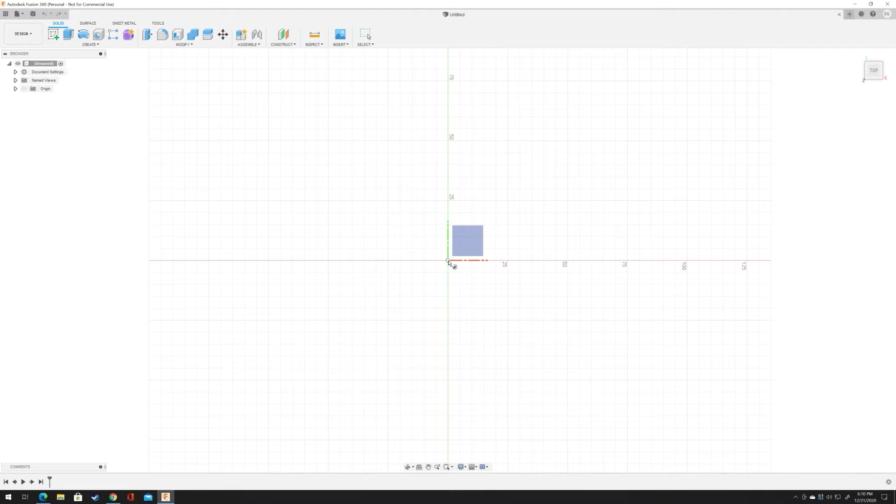So I'm going to begin with this one, which I'm drawing out right now. Here's our first circle, and I'm just going to bring it out a little bit. I'm going to go to the keyboard now and change the value you see in blue there, typing in the value I want. The value I want for this diameter is 25 millimeters. So I simply type 25 and hit enter. Now I have a 25 millimeter sketch of a circle that you can see here.

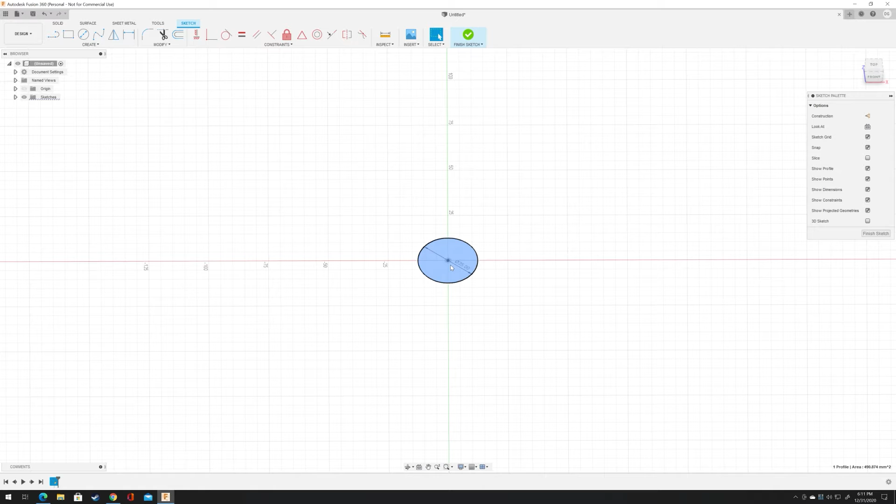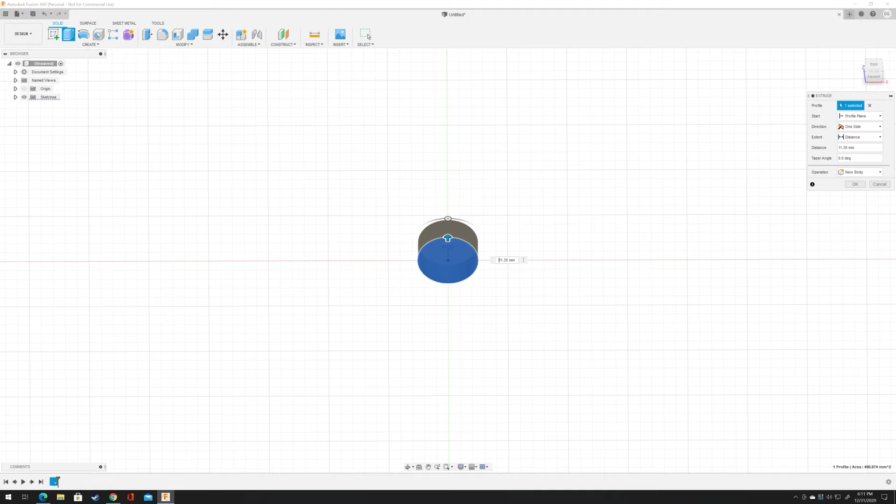From there, I'm going to select the circle and extrude a cylinder based on this circle. So I'll go into here and right click again, go down to extrude, hit the extrude item in the spider menu, and bring this up. For now, I'm going to make it 10 millimeters. And there you go. We got the base of our knob, our little hockey puck here, and it is 10 millimeters high with a diameter of 25 millimeters.

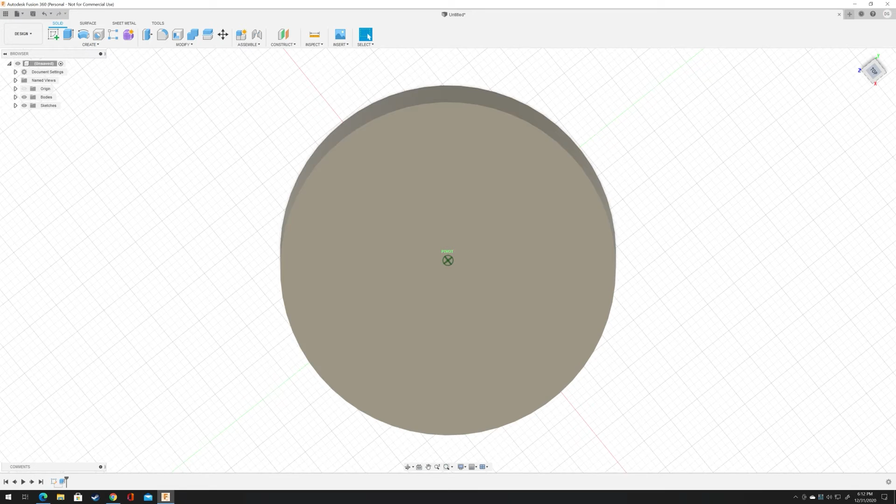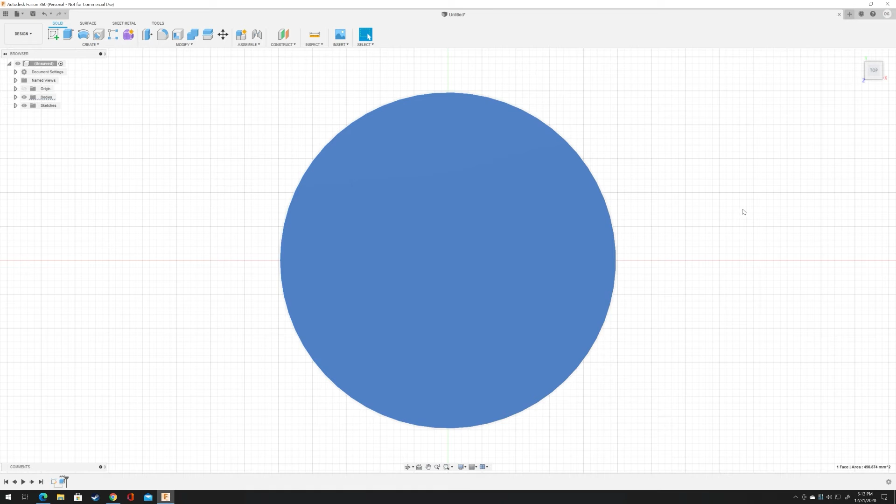What I'm going to do now is draw the bigger portion of the handle, which is going to be built on top of this surface right here. I'll go back, select it again since I lost it, hit the right button, go to sketch, go to center diameter circle, click on this, and this one is going to be much bigger. I'm going to make it 50 millimeters. Now, this is kind of large probably for a normal button, but for what we're doing here, I think this will do.

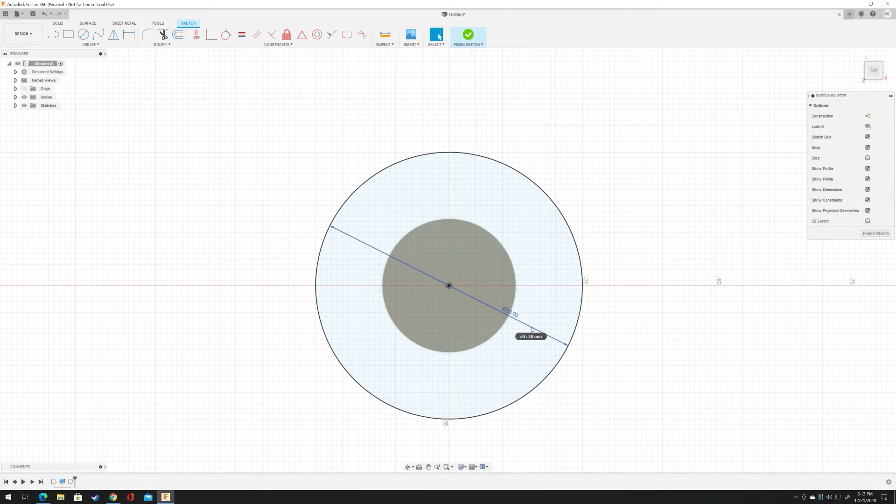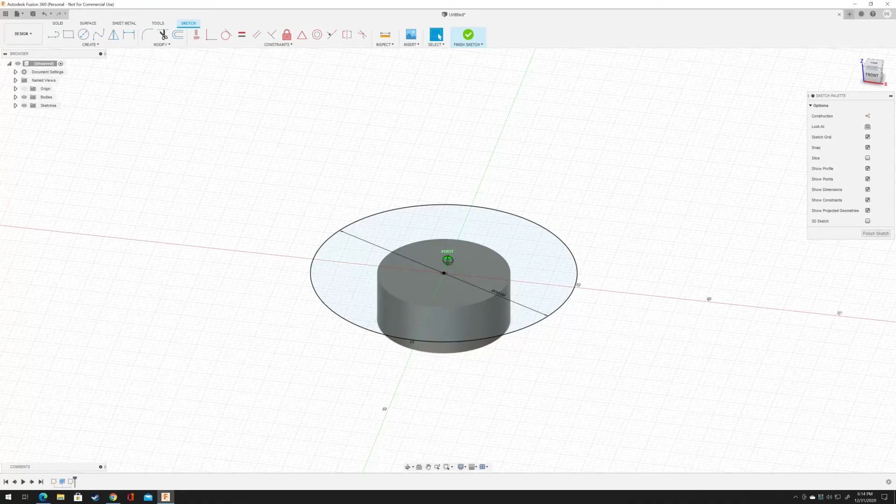So now we bring it up here. We can tell that we got a sketch riding off the top of our hockey puck, and this is going to be the handle hold portion of our knob. I'm going to go over and select this. Now, you notice when I select it that a ring appeared, and this circle is broken into two parts: you got the center, and then you got the ring. This is the consequence of drawing something on top of an object. You will have this. Now you can click them both, hold the shift key and click them both, and you have selected both of them. Or you could go over here and just select this, and you would have selected the top of the hockey puck again, or I should say the base.

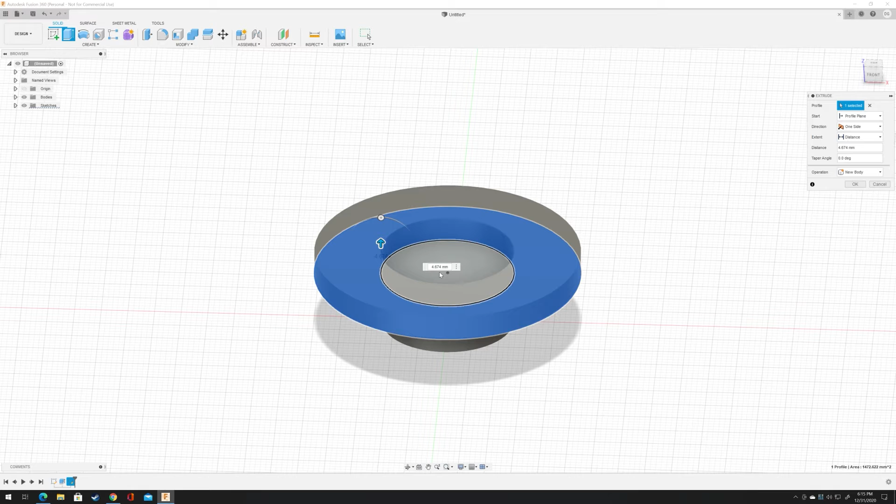I'm going to make a cavity which the bolt will hide into. To do that, I'll click on this ring, right click, go to extrude again for the body and the solid, and go up a little bit. I'm going to make this another 10 millimeters. Now, something to keep in mind here is that we're building a 3D structure.

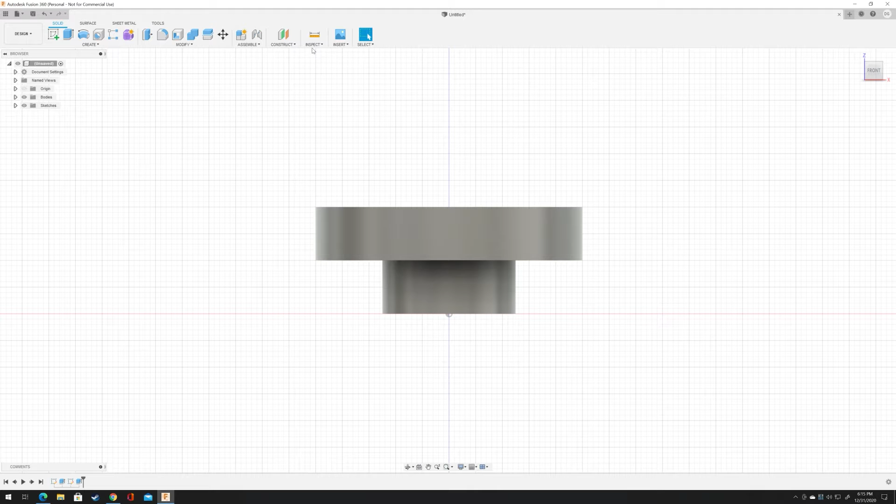As things stand right now, I'll go over here to inspect and cut this in half so we can analyze it from a cutaway view. You notice right away that if we went ahead and made a print, or generated this knob the way it stands, there would be an issue with the integrity of the object, and it would be very obvious looking at it right here.

Basically, the top handle would probably rip off from the base, and we don't want that. So I'm going to cancel this.

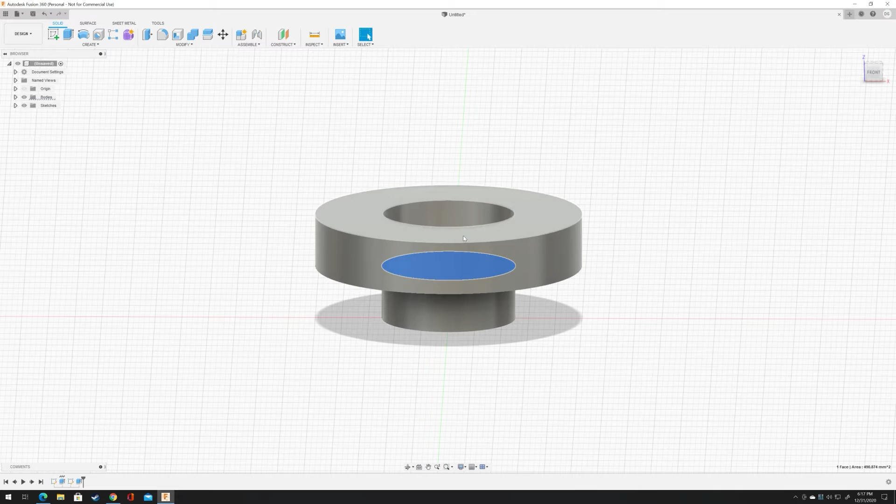I'm going to go back down here to the pivot again, and make sure I selected the top of the base of our knob, or the hockey puck if you want to call it, and go back up to here. I don't see it, it's not visible. Hang on a second. I'm going to select this... okay, it's here somewhere. It was here.

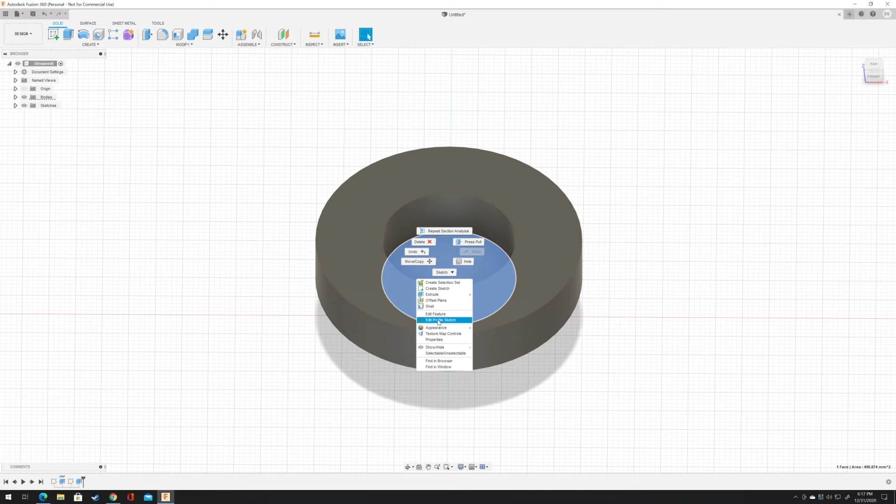Heck, I'm just going to use the E key. I'll press the E key, and that will force me into extrude mode again. In addition to the 10 millimeters, I'm going to bring this up another 5. And hit OK.

Now we'll go over here and look at this from the side view again. We'll do an inspect, a section analysis from this angle. And you can see now we have a lot more beef to the knob here.

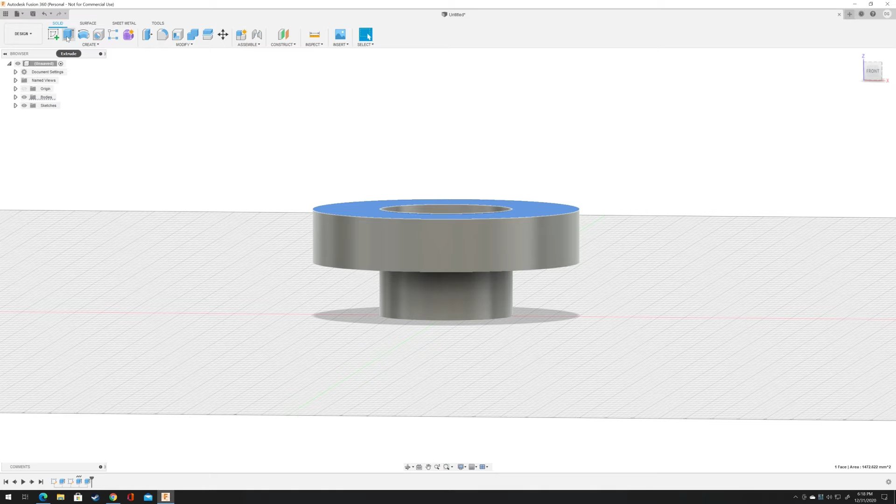About the only thing I probably want to do is raise this up just a little bit. So I'm going to go over here and hit this. This time I'm going to hit extrude from here, and raise this. It doesn't have to be much. Let's make it another 3 millimeters.

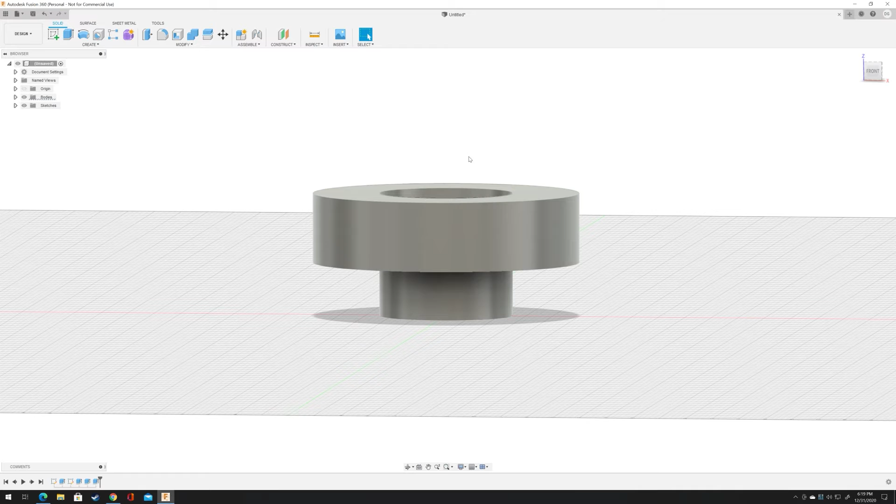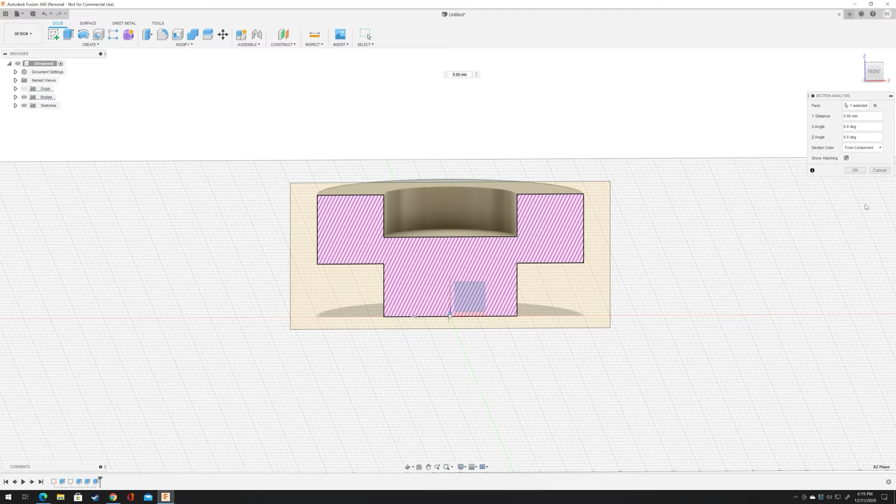It should be enough. So now we'll do an inspect, get things from a section cut in half, and now we have a little more space. We want to put a cap on this somewhere down the road, which I won't demonstrate in this video, but it's something I've done. We have enough cavity here that I can install a cap over this to hide the head of the bolt, which is going to be right here. So go and hit that, and there's our knob.

Well, right now we've got a pretty slippery knob, and I want to add some grooves to it to make it a little easier to turn with our fingers.

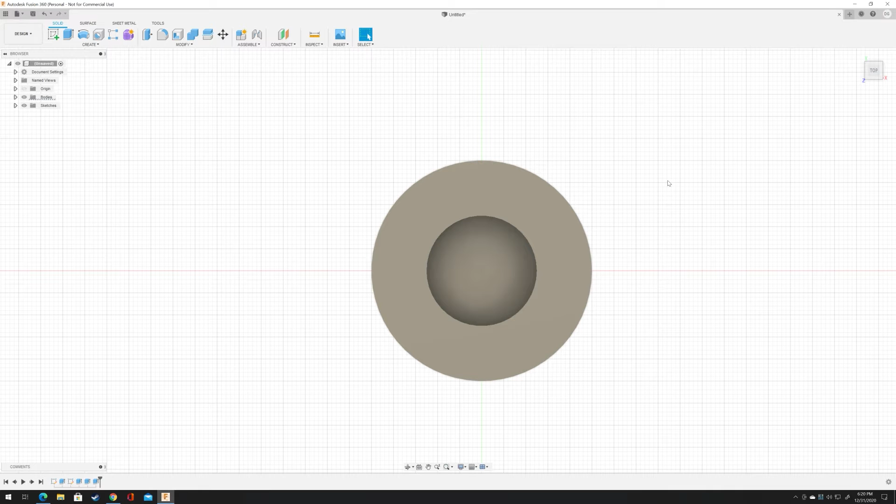So what I'll do is go back and generate some circles, and with those circles use some cylinders to actually cut notches. Now, it's a kind of strange concept to create an object to cut away an object, but that's generally how you shape things in Fusion 360, at least in the design mode. It's not that hard to do.

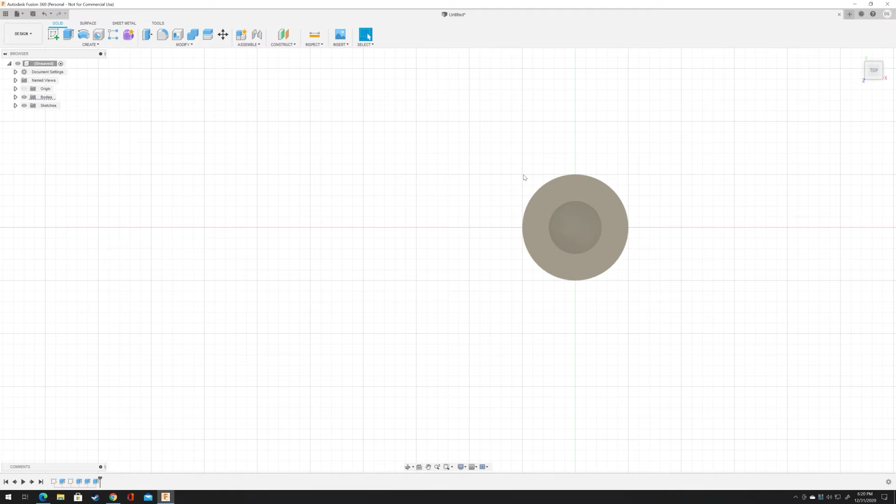Let's go over here. It's just like what we did when we made these two round objects here. We go over here, hit the right thing, go to sketch. Oops, right here goes sketch, create a circle. This time I'm going to go off the 25 millimeter mark here.

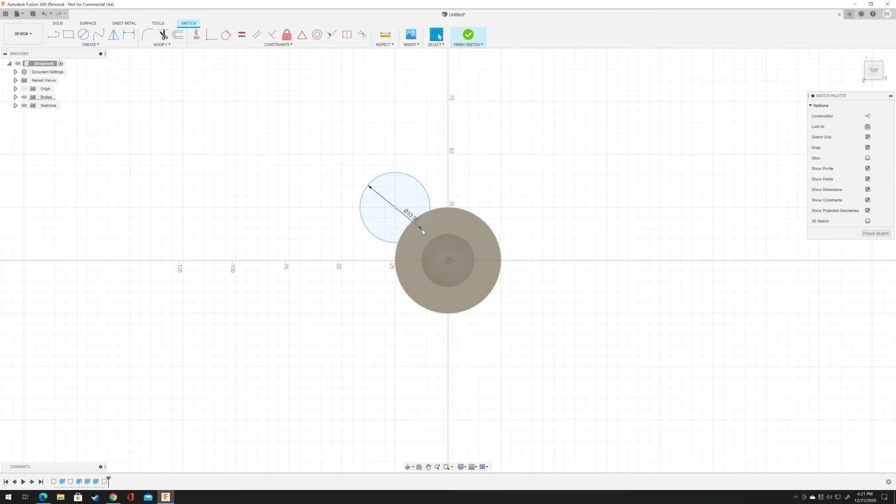I'm going to hit right there, bring it out, and make this 33 millimeters. And there we have the basis of our cylinder.

We can go over there and select it. I'm going to bring this over to the side here so you get a good view of what's going to happen here. We have our circle, and I'm going to go here and do an extrude.

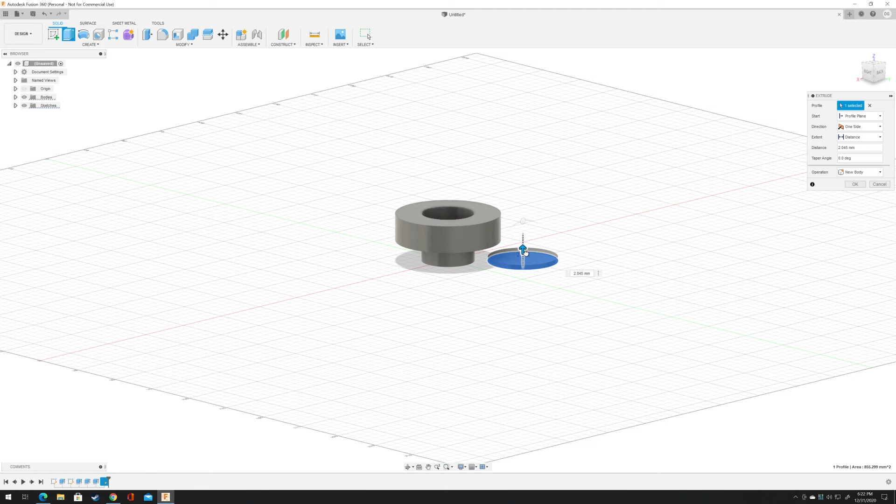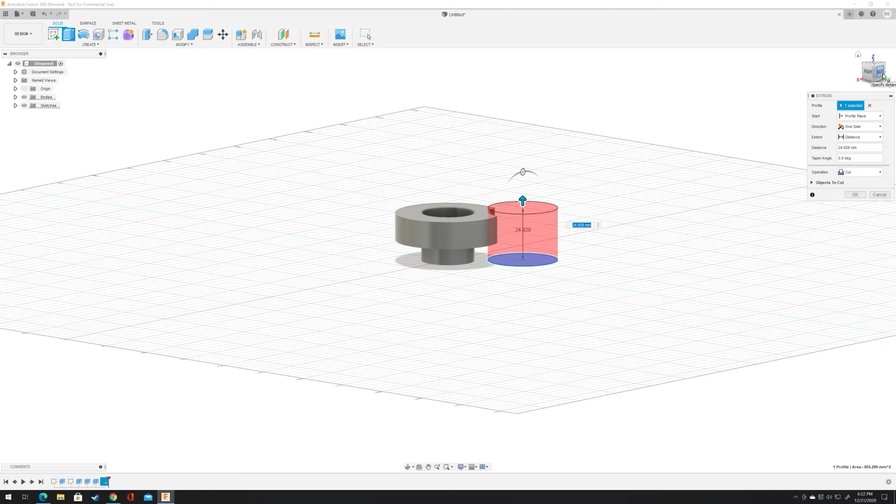Now, when I do the extrude at first, it's going to look like I'm creating a circle, doing a new body. This right here says new body over in the menu. So as I go up, I will intersect with this object here, with the handle, and you'll start to notice this thing is turning to cut. As I go around here, you can notice I'm milling away at the upper cylinder of the upper ring, and I'll continue to do so until I get up to here, and you can start noticing the cut right about here.

And this is the program assuming that you want to do a cut. This is what it does by default. Now you can actually go over here and you got different choices here. You got join, you got intersect, which is kind of useless, but it's there, as well as just do a new body, which is basically just generating a new body that's intersecting with another body.

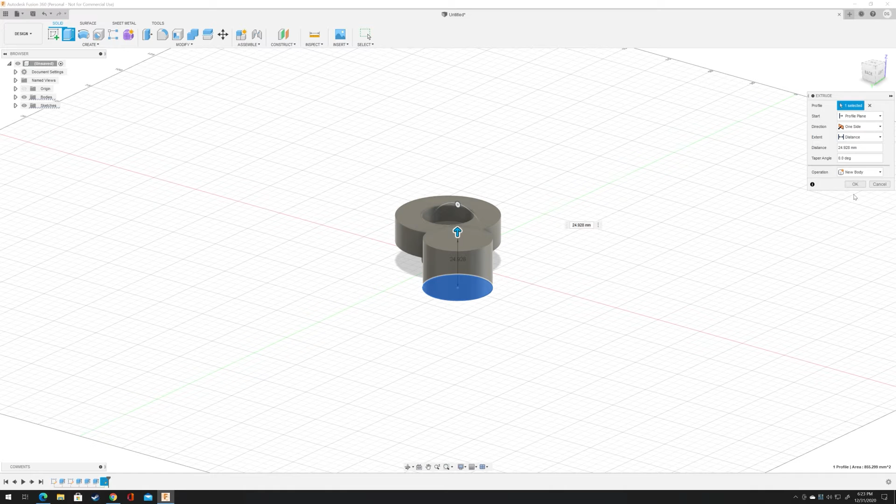What we wanted, of course, to do is cut, because we want to make the first notch of our finger notch for our knob. And so that's exactly what we're going to do. And how tall the cylinder could be, it really doesn't matter. It's just as long as you are cutting, going straight through the handle. That's all we're really concerned about at the moment.

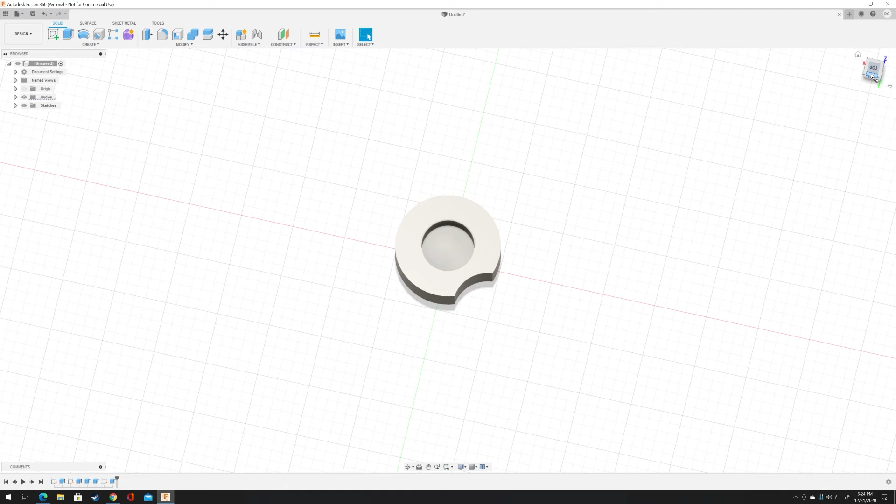And you can see the cut right there. So say, I like that. So I'm going to hit OK. And our cylinder will go away, and we're left with the absence of where it intersected, and we got ourselves our cut. So I'm going to go back here, and I'm going to do the same thing 4 times.

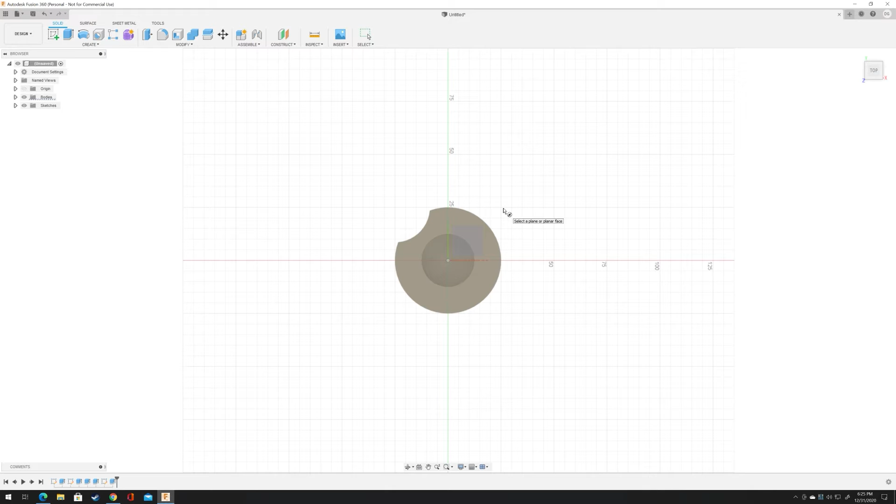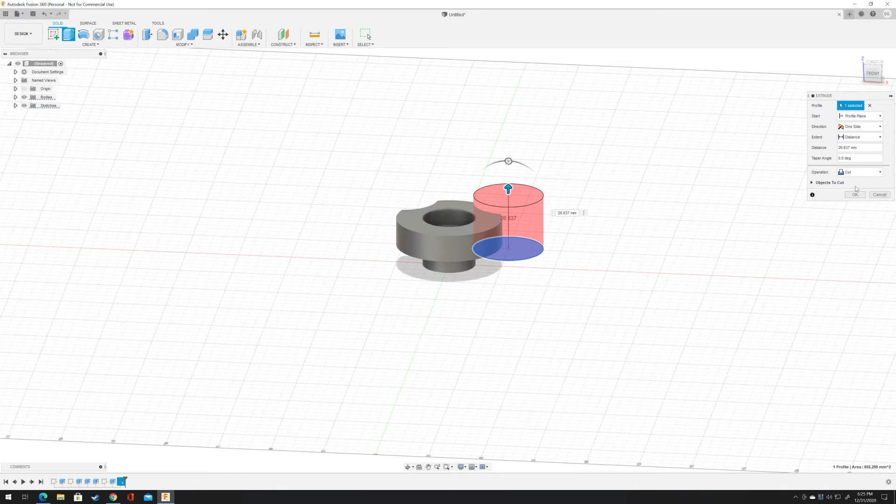And I'm going to start off here. Go sketch. Go center diameter circle. Go over and pick our surface right here. And go out. Type in 33. Go over, select this. And this time I'm just going to hit the E key, and I'll go to extrude, and then it will pop out, and eventually you'll see it cut through our handle hold here on our knob, and go plunk,

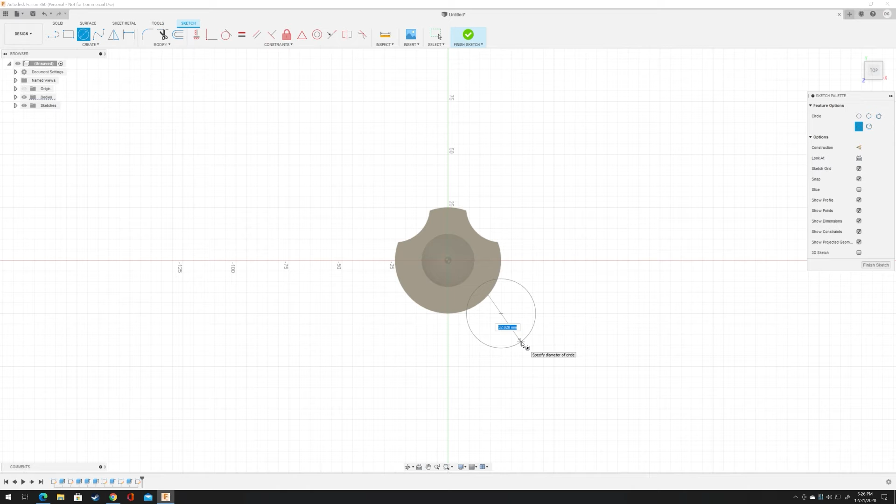and then go to the top, sketch, center diameter circle, plunk, plunk, and usually you've got to hit the thing twice where you want it in order to get it in the space that you want, because that's where the center is going to be. Well, you can tell in the corner here where the sketch palette is that you can choose between various different types of circles. But we're sticking to just a diameter generated circle for now.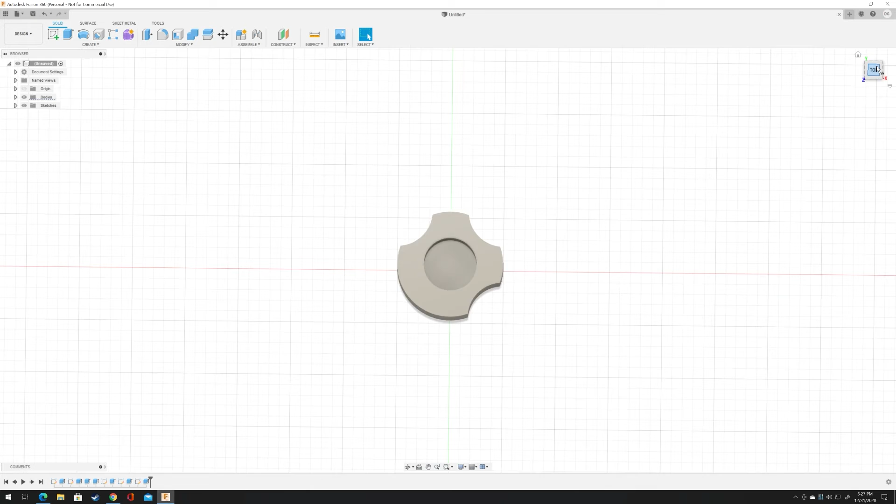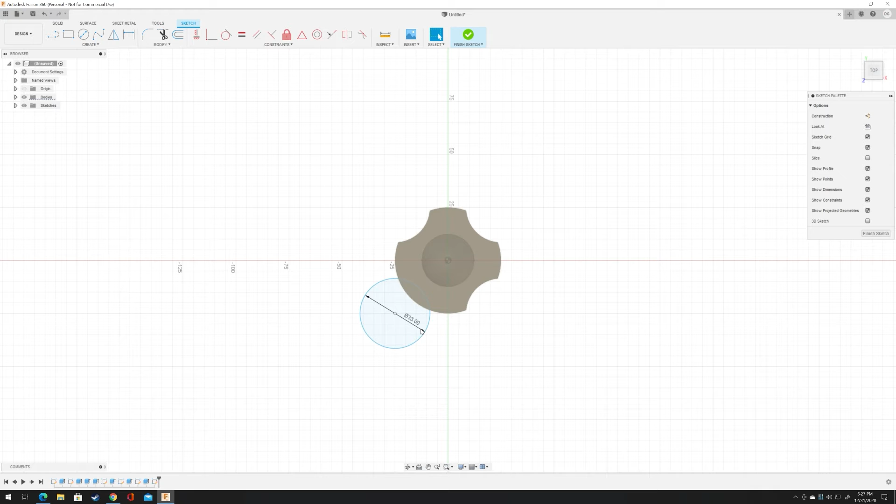I'll make it 33, enter, select, extrude, and I'm going to move it over on the side here so I can see the arrow. I can just pick up the arrow and just drag it through, hit OK. Do the same thing at the fourth quadrant. Pluck that. 33. Select. Hit the E key. Go through and cut our little thing. Extrude and cut.

And go over here and voila, you have the basis for your knob. There's your very simple little knob. Now the next part of our lesson here is, well, it'd be okay to put a hole in this thing. That would be one thing we could do. But it would even be better if we can recess a bolt, a cavity that would precisely fit a bolt. And this is one of the times where Fusion 360 really shines. And I'm going to show you why.

I'm going to go over and go into the Insert menu here. You could insert various other objects into this drawing to add whatever detail you want. But the one I'm interested in is insert McMaster-Carr component. McMaster-Carr is a company that generates everything from bolts to, you know, they have welders, they have everything. They're a little bit of everything. They're like the ultimate hardware store.

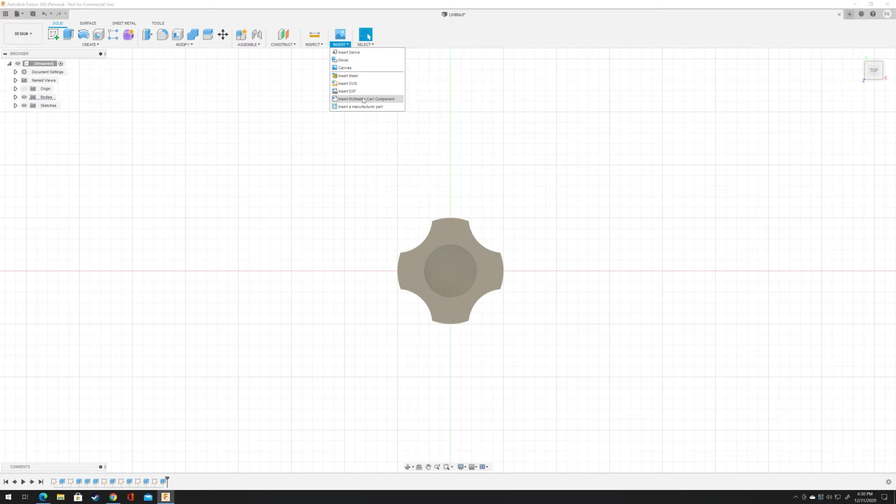And one of the nice things about McMaster-Carr is with their components, particularly their bolts, their nuts, their hooks, it also comes with a CAD drawing that you can incorporate into your drawings. And that's what we're basically going to end up doing, we're going to end up borrowing one of these CAD drawings from this catalog that they have. I'll click on it and you will see the catalog right here. I'll try to make it a little bigger.

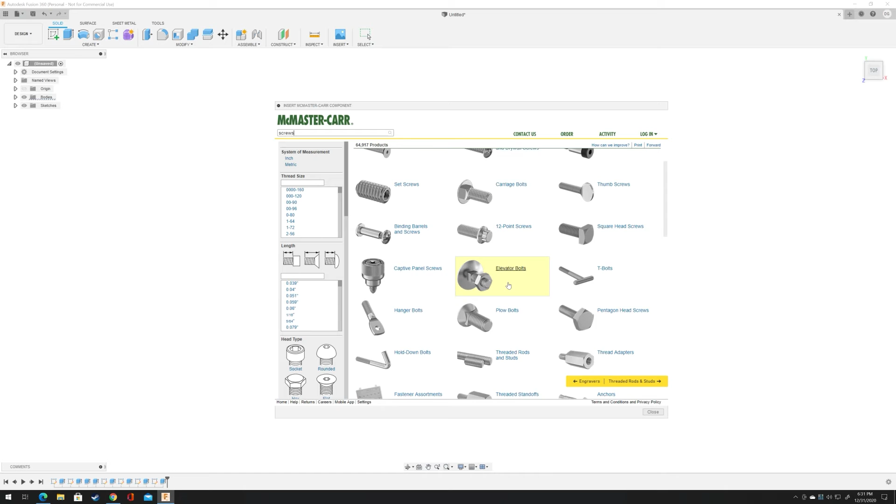And we got here the website of McMaster-Carr, and we can select various objects here that more likely than not have some form of drawing. At least most of the items they have drawings that you can use in CAD design. In our case, what we're concerned about is the bolts. And here's a whole list of their bolts. They got just about every type of bolt that you could ever want.

I'm interested in hex head screws, so I'm going to click on that. And I'm not too fussy, you know. I'm going to go pick a grade 8 steel hex head screw, which is more powerful than I need, but will do the job that we want to do at this time. And I'll click on that, and then we get a whole list of their partly and fully threaded bolts. And it's at this point that I can go over here to the little side menu and define exactly what I want.

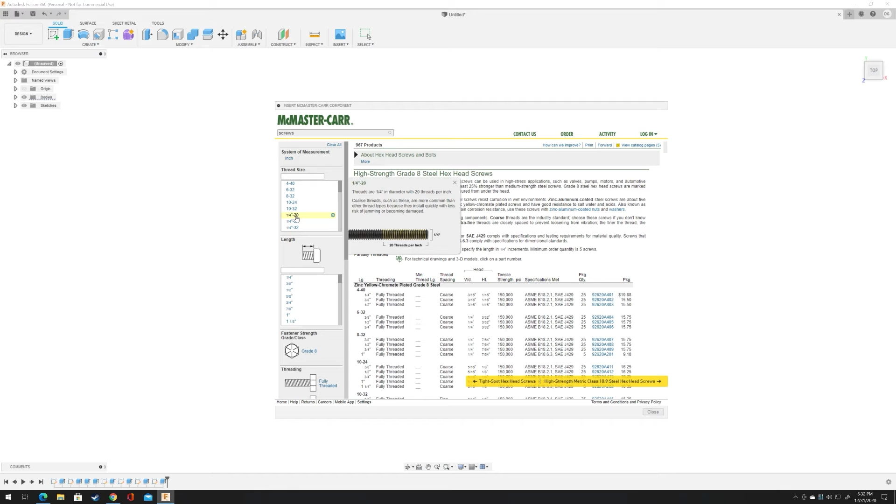And in this case, I want a 1/4 inch 20 thread per inch bolt. I want it to be 2 inches long. I want it to be partly threaded. You'll see why later on. It'll of course be grade 8. It will be steel.

And the head width will be 7/16. The head height will be, oh, we get a choice. Well, let's pick the slightly larger. And there, we're down to one selection over here.

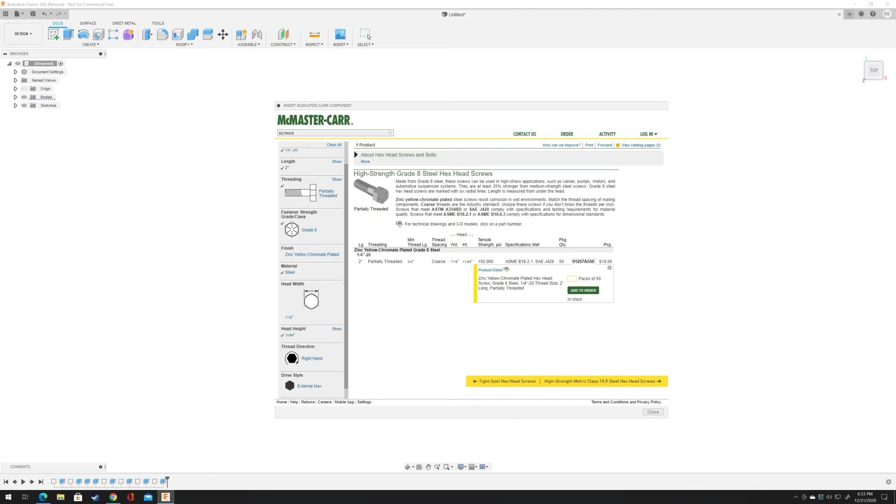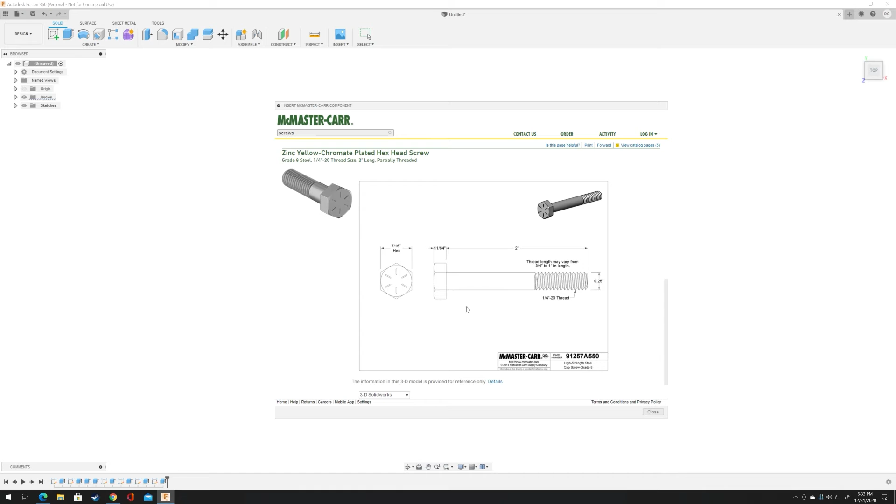And then we're going to go over here. We're not actually ordering anything right now, but we do want to see the product detail. We can click that right here. And we get a very deep detail, including a nice little draft drawing of our bolt.

But we also get a downloadable 3D drawing or 3D model of our bolt that we selected. And for the sake of Fusion 360, I'm going to pick a 3D STEP bolt drawing. And I'm going to hit save.

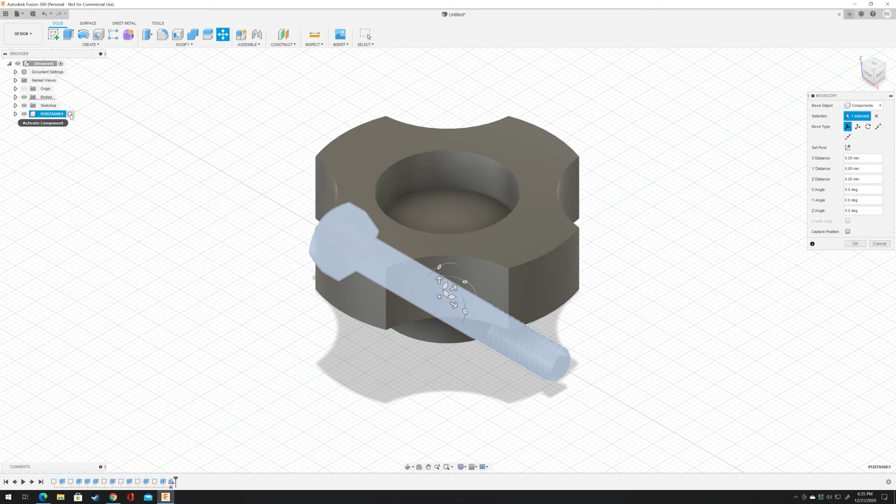And the thing disappears. And our bolt, first of all, appears down here within the base of the drawing. It is rotated. We're going to fix that. It's in its own little separate class right now. We're going to have to go in here and turn it on. And I'm going to click on this. Oops. At least I'm going to try to click on this.

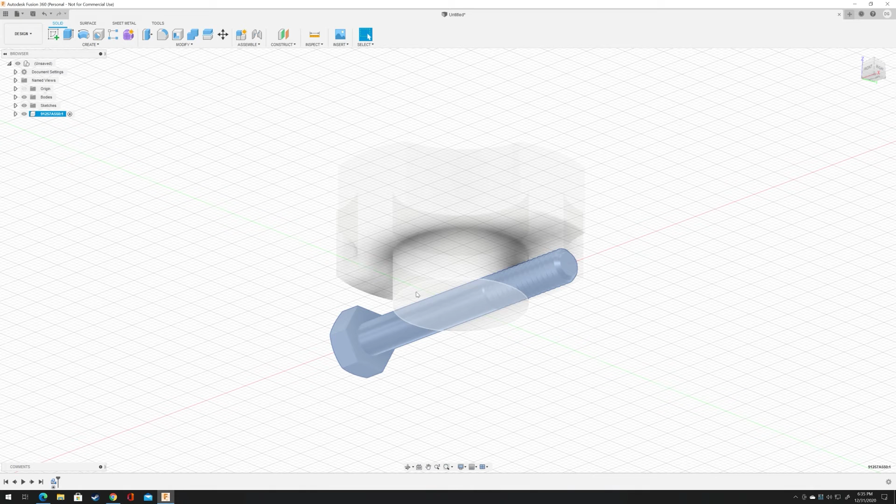I'm going to click on this, and I'm going to go in and move the bolt and rotate it. I got these little things over here that I can use to rotate the bolt any way I want. But I'm going to go here to the front. And for right now, I'm interested in just this right here and just rotating the bolt so it's straight up and down at a 90-degree angle.

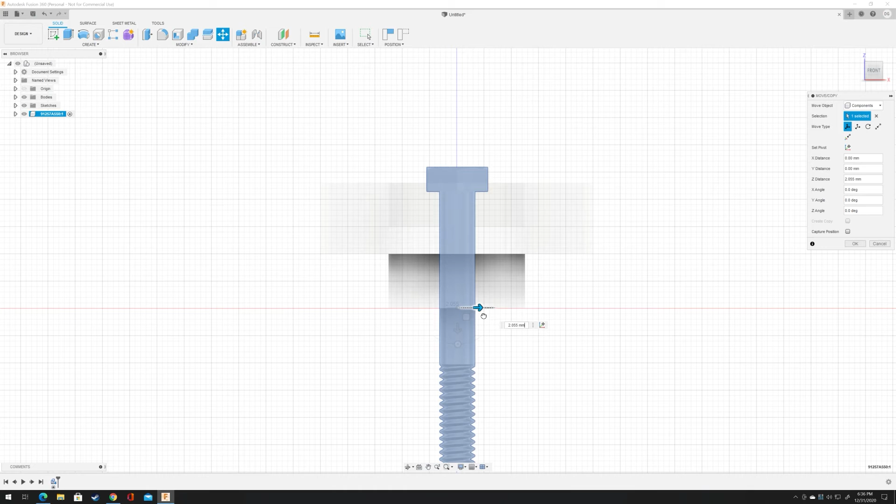And then I'm going to move this thing so it's kind of dead center. I'm going to use the guides to kind of eyeball this thing in here. And then I'm going to go over to the top, and make sure that this thing is center to the top here. I think this is about as center as I'm going to get it. It's at 0, 0. And Z is 0.54 millimeters.

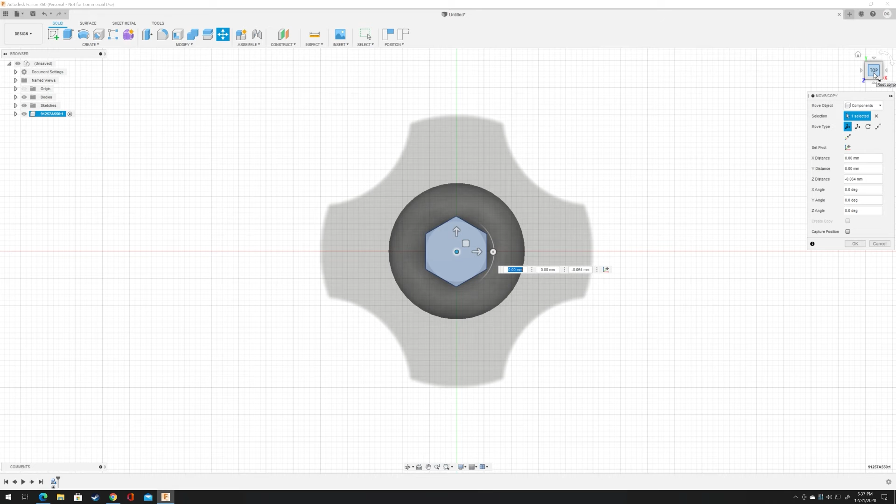I'm going to bring it down here again. I notice it's a little north of where I want it to be. So I'm going to bring it down to roughly here. And I'm going to turn it around and say to myself, well, I could go a little further south. What I'm shooting for is to make sure that this stays above this surface that you just barely see here.

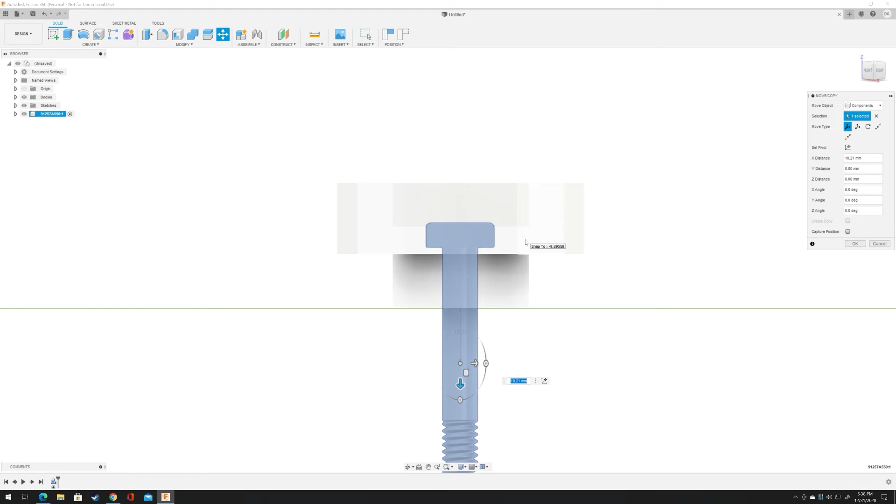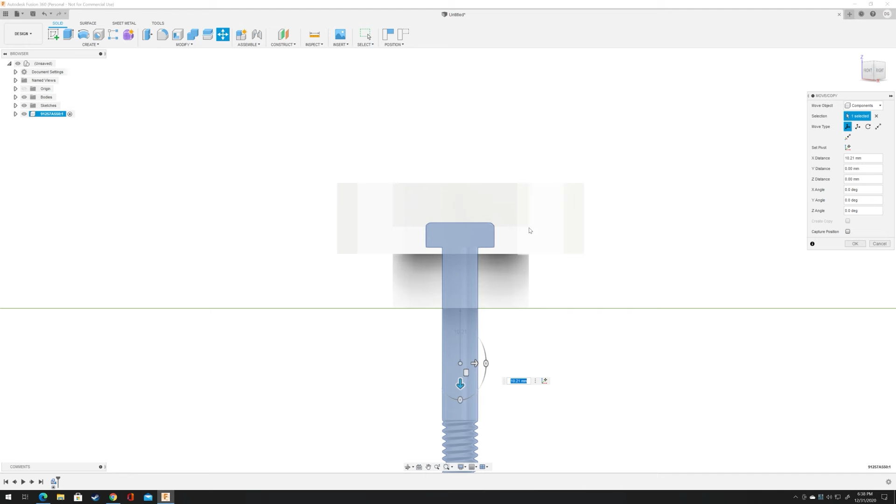So what I'm going to end up doing is selecting the object as the subject of what I want to cut and using the bolt as the cutting tool. And I want to make sure that this ridge up here is above the surface line, which is right here, which is part of this right here. And as far as I know, everything looks cool. I'm going to click OK.

So we have our bolt placed in our knob. You can see that we are ready to cut our hole. The nice thing about using these particular bolts is the bolt is pretty standard. So we could use the bolt that we got from the catalog. And in fact, the catalog number is right here if we need it.

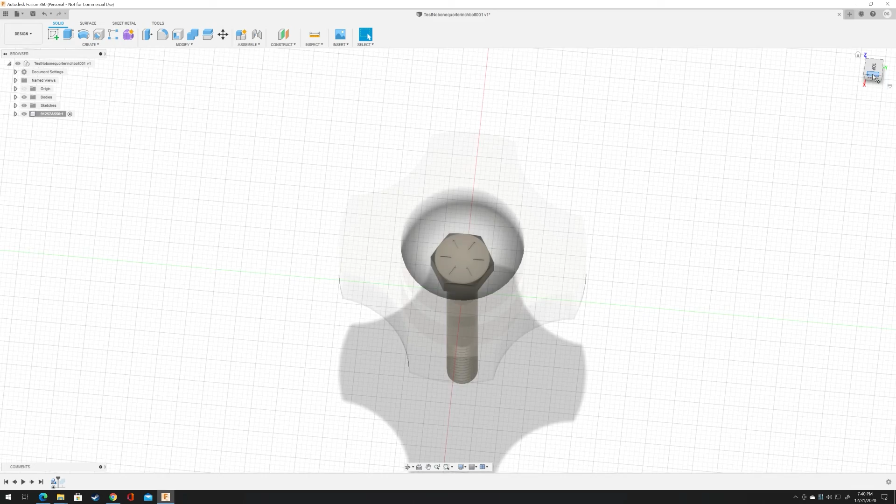Or we can use anything we can get from any other source like Home Depot or your local Ace Hardware, and use that bolt, but it should work for this knob no matter what. But first, of course, we have to cut it. So that's going to be our next step, to go back into our knob here, because this is set up as its own body, which is great because that's what we need. Go ahead and go to the top.

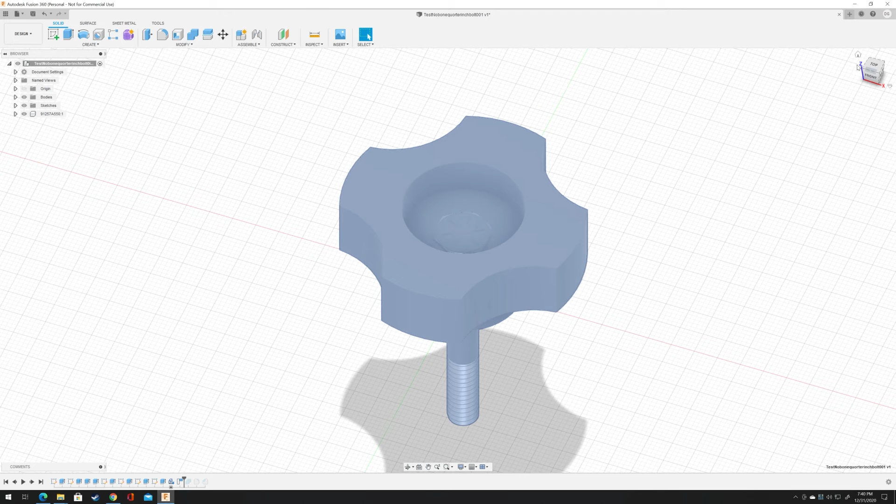Now I'm going to use the combine tool. It's kind of strange to think about using combine to cut, but that's generally the nature with Fusion 360. You often use an object to either add or to remove. In our case, we're trying to create a hole using this bolt, and we're going to do that using the combine tool.

Now under combine we can either join, we can cut, or we can intersect, just like I showed you earlier on. With a combine, you have a target object and you have a tool body. In this case, our target body is our knob, and our bolt is going to be the tool body, the item that we're going to use to cut the hole with. So we'll start off by clicking on this.

And sometimes when you click on this, you'll get a message that says the position has changed. But you want to use whatever is there at the time. If you don't want to change the position back to the original position, just say continue, or calculate using the existing condition. In this case it didn't come up, so I'm not terribly worried.

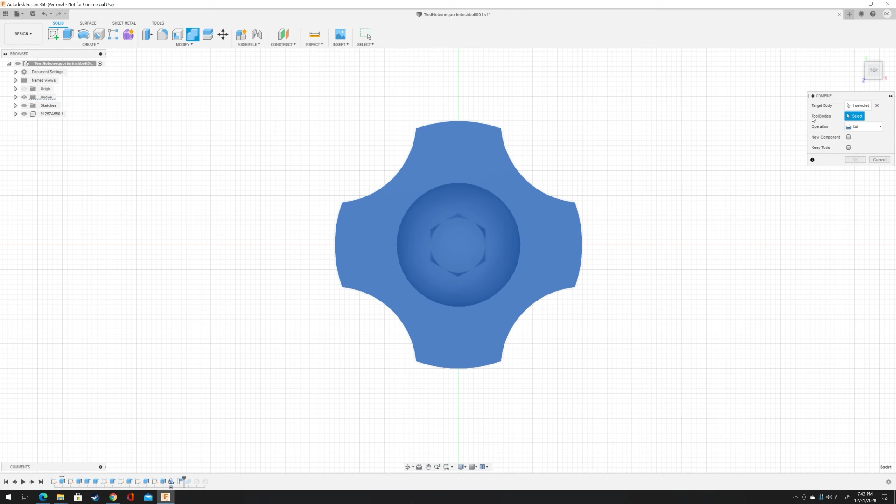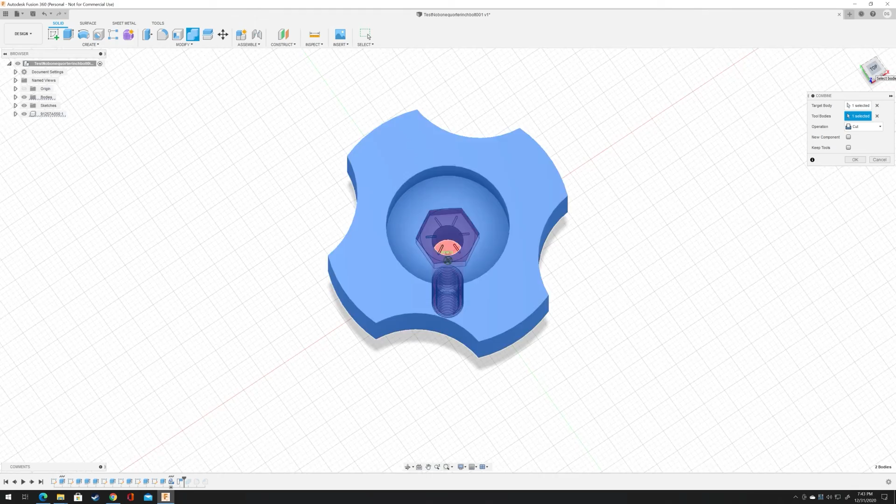But the next thing I'm going to do is choose the tool body, which is right here. And you can see right off the bat, I'll rotate this thing so you can see it. We are ready to cut a hole. It's already determined that it's cut the hole, and it's done all the calculations, and it has literally cut the hole for us. All we need to do, and hopefully this will work, is go over and hit OK, and we got the hole for our bolt. So technically we have our knob with all the specifications that we need.

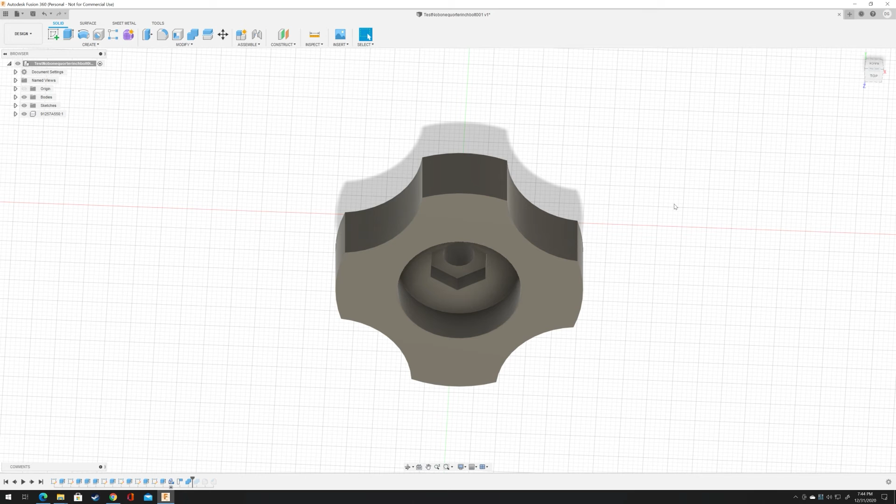Now I want to add, purely for cosmetics but also to make it a little easier on the user, a chamfer, and I also want to add a fillet. And we'll start by adding a fillet to the top. I will go up to here and add fillet, since the fillet will work on the edges, and we can very conveniently select the edges over here. I'm going to go over to the top here. There we go. And hit one edge, and it turns blue. And hit the shift key, hit another edge, and another, and another, and so on.

And there's two ways to invoke the fillet command. Well, actually three. By default they have the fillet command up here. And the other thing that you can do is you can just hit the key F, and it will go in and do the fillet.

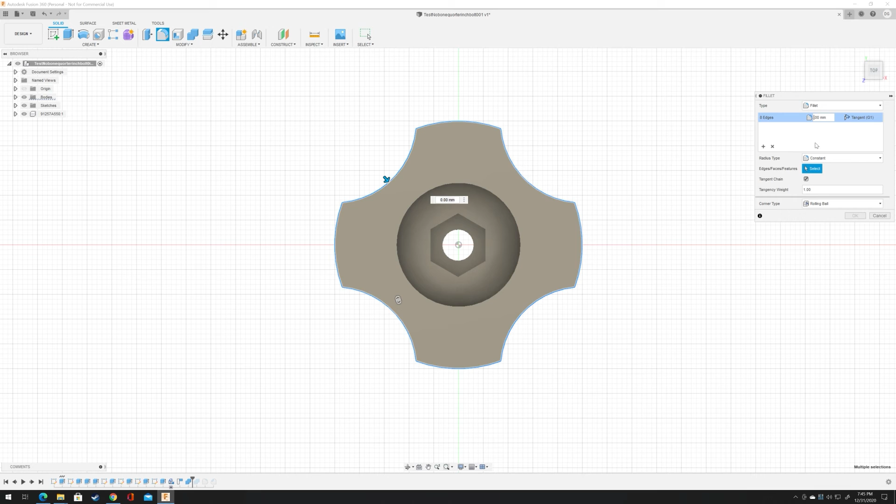And out of trial and error, I found that if you set the fillet to 4.5, and I'm just going to do it up here because you got 8 edges and it's already selected, that is adequate for the knob. And you can see we have a nice round top. It'll be much easier for you to grab that knob and turn it.

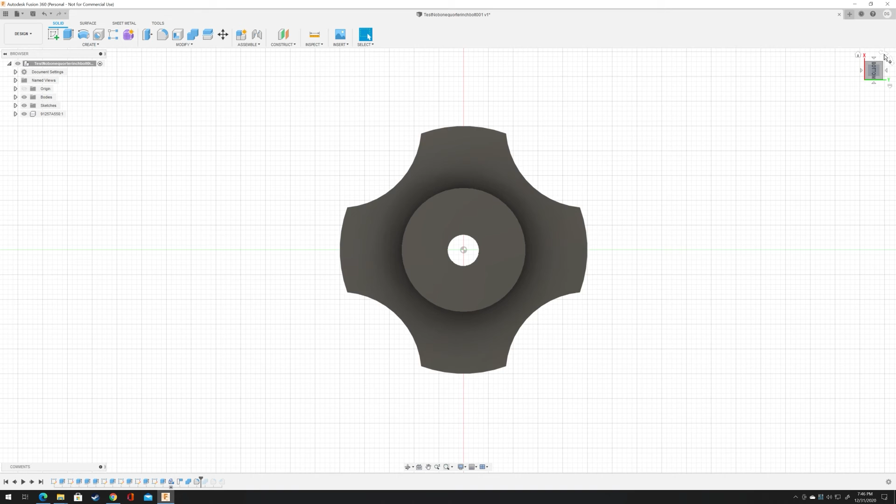Now I'm going to go around and hit chamfer. And to do that, I'm going to go to the bottom, and I'm going to hit the edges for the bottom. Start with this one, it'll turn blue. Hit shift, hit another edge, another edge, another edge here, and finally the last edge here. And I have selected the bottom edge of our handhold for the knob. And then I'm going to go over here to modify, and right down here is chamfer, and I'm going to hit that.

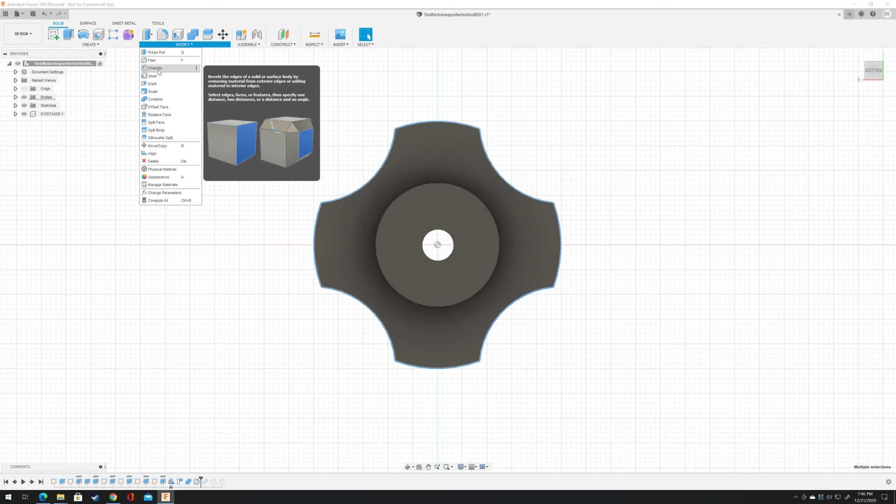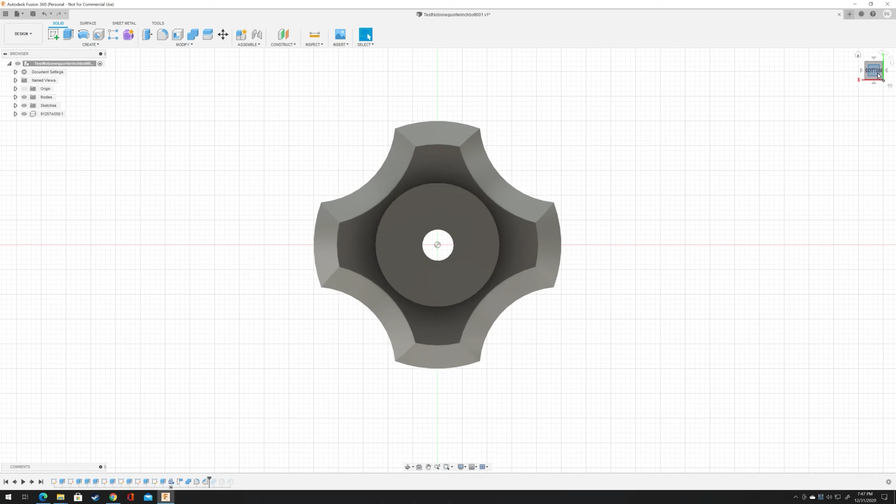And what I can do is take the arrow and bring it down to here, but I want to make things uniform off the bat. So I'm going to make this 4.7. I'm going to give it a little deeper chamfer, and I'll explain why. I'm going to go do this. You will see why. There you go. You got the bottom edge. You got something you can go under and grab.

But there is one more thing that is probably not quite obvious to you, but is quite obvious to people who do 3D printing with plastic. A large amount of the time, this section here, which in the 3D print is being created in thin air, has to be made using basically the nozzle just drawing plastic out there until something catches. And the only alternative is that you make a

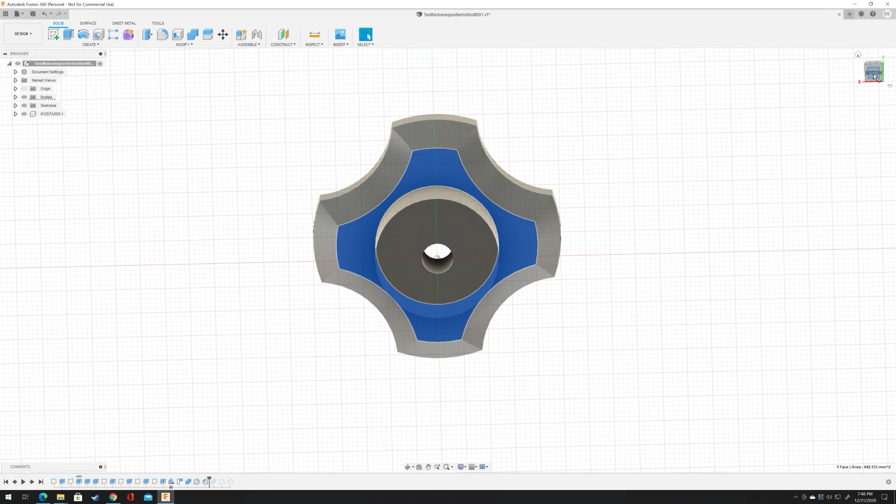thing called the scaffolding. Well, if you go the scaffolding route, it's quite adequate because you get a relatively smooth surface down here. It's smoother than if you didn't have the scaffolding. However, it's going to eat up some of your plastic. If you go and build it without scaffolding, you're going to see a lot of lumps appear down here, and you're going to have to sand those off eventually. That will be the end result.

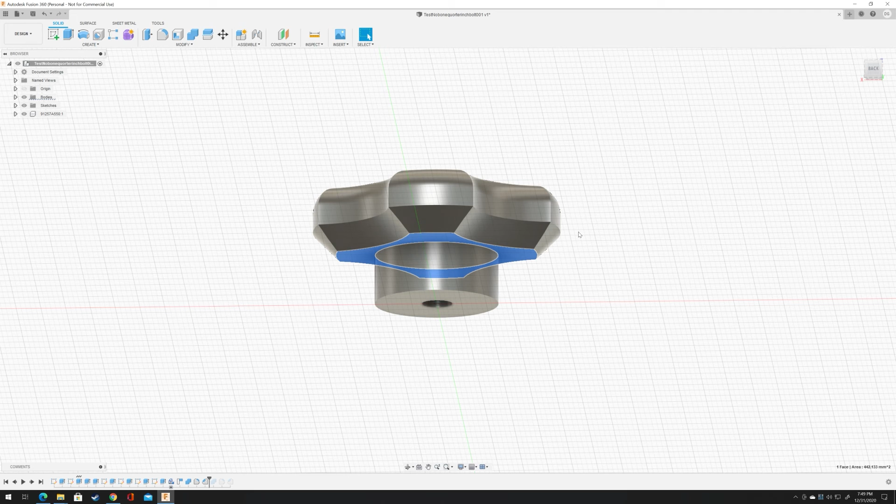By limiting how big this is, I cut down on the amount of scaffolding that I'm going to need and or lumping that's going to occur down here. Because when it gets to these chamfers right here, those are much easier for the printer to print. It's easier to build on a curve like so. It's easier to build on this little curve over here with your nozzle than it will be to go all the way out to here and then go up. And so we want to keep that.

So we got here our completed knob. Let's go ahead and save it.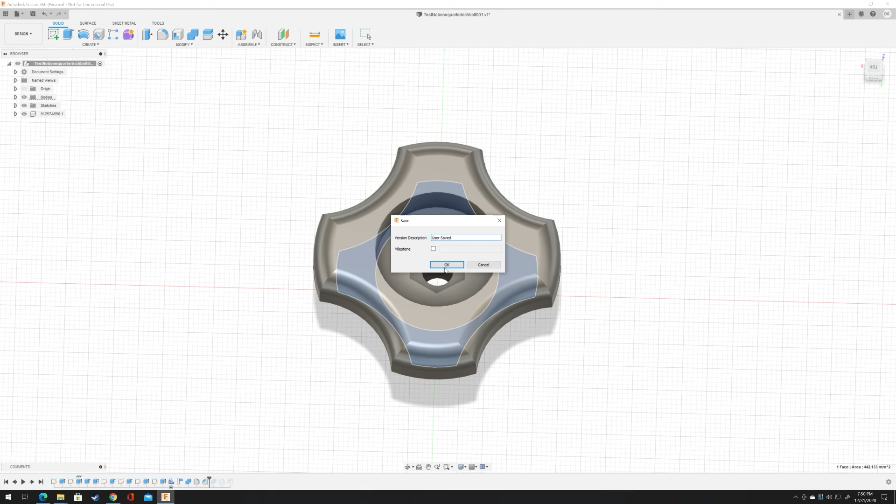Or in my case, this was already saved before, so I'm just saving a variation of it. And then one of the things I want to show you is how to prepare this knob so it is ready to be 3D printed.

And I'll go over here and we'll go up to File, go down to Export, and this is the original name of the knob when I created this project. Right now it's saving it as an Autodesk Fusion 360 file. I want to change it to something that the printer can understand. And I could also use it for other stuff, so I'm going to make it an OBJ.

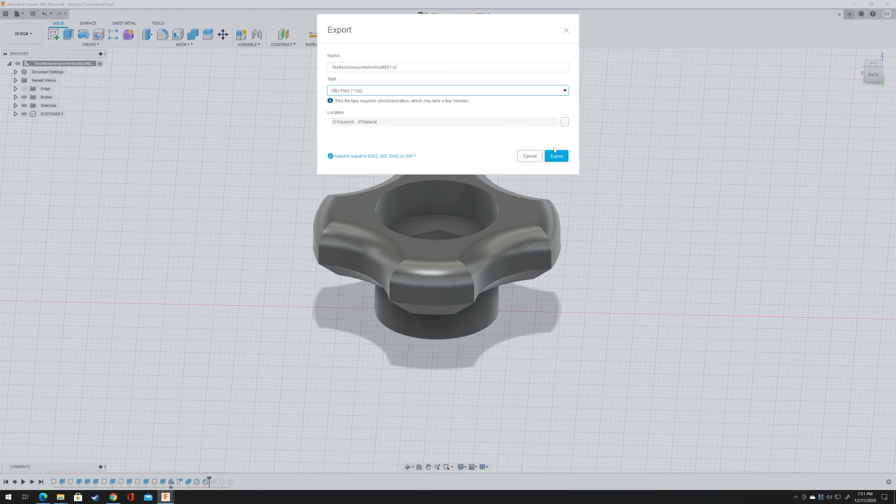And I'm already directed to the proper location where I want to print it. I won't bore you with that. And I'll hit Export. And as you can see, I've created this knob, and I can go over to the printer and go over to what they call the slicing software, called CURA, and I can show you how this knob is cut and explain to you a little bit about scaffolding.

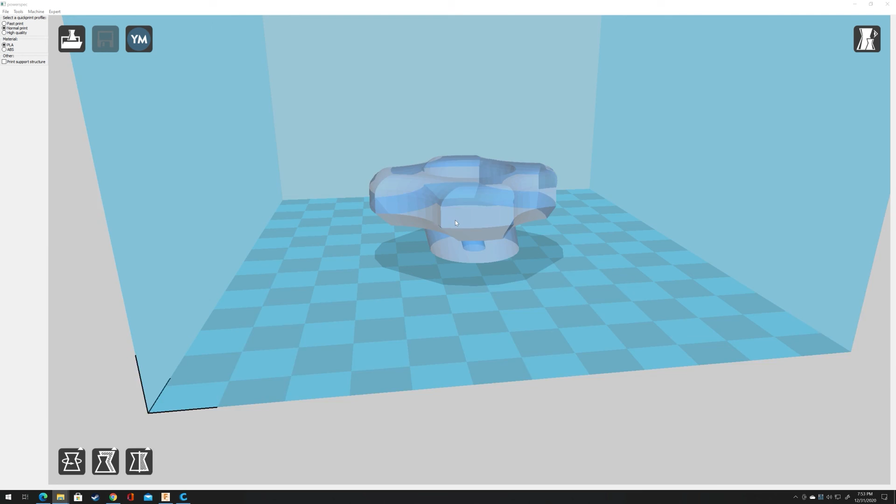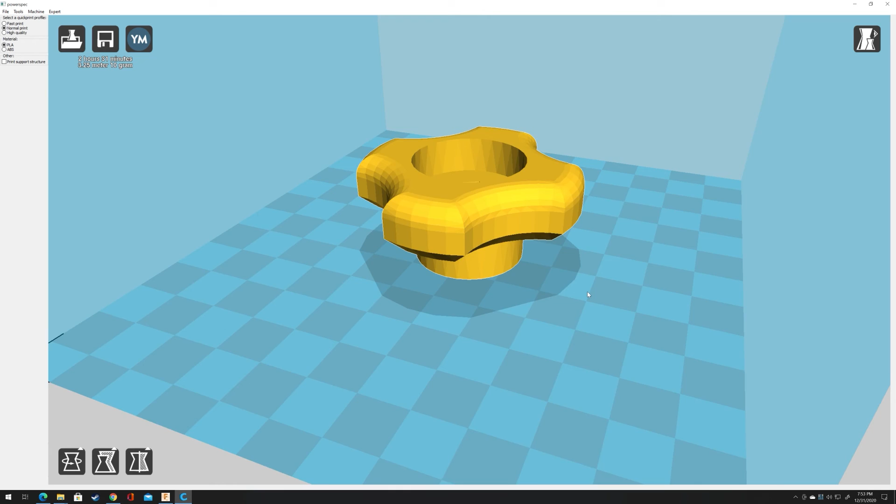I have in fact the knob over here, I could just bring it over and drop it in our scene here. And you can see here is our knob as it was before, and you can see the way it should look.

This is without the scaffolding, and it's going to take 2 hours and 31 minutes to create this knob under PLA using a normal print. I can go to a fast print, which is only 1 hour and 5 minutes, which is a very crude version of this knob. It would work. It would just be much cruder.

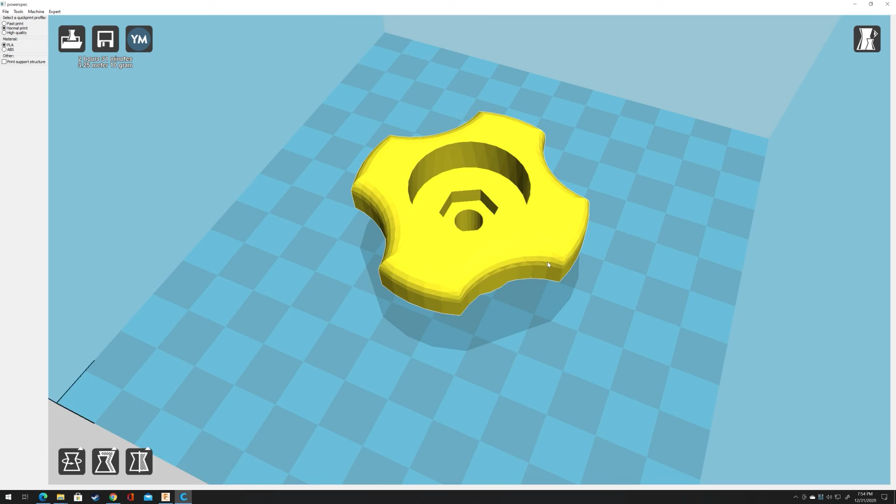Or I can go to high quality. It gives you a very well detailed, very smooth version of this knob, and it will take you 4 hours. Now, I don't know if you want to take 4 hours to build a knob. It's up to you. It makes a pretty nice knob. Very little cleanup. But I'm just going to pick normal, because I know it's going to be just adequate for my need. It's just going to hold together the panels on a tool that I have in my shop, so I don't need to be very fancy with it.

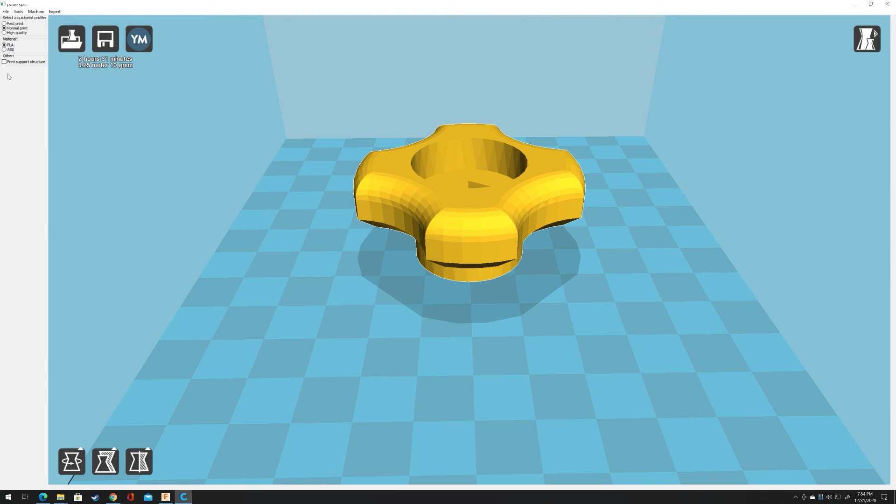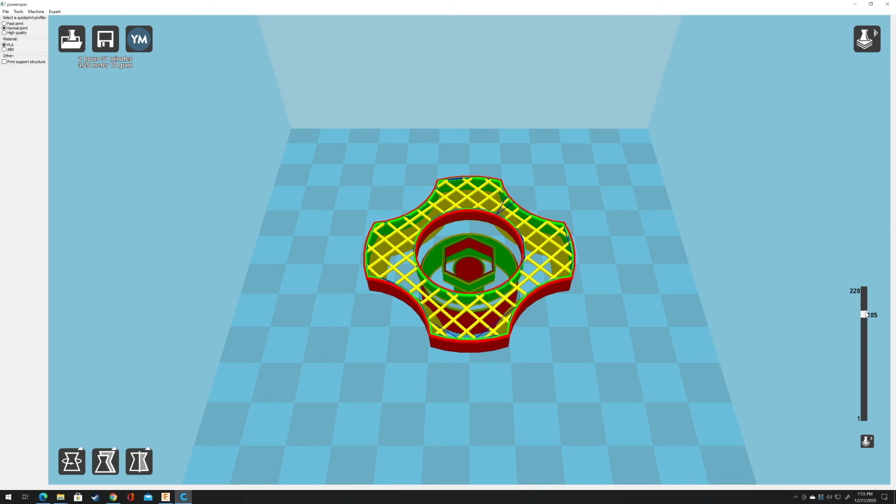Now, the way you see it, it's being built without scaffolding. And you can see that it's going to take me 220 layers to build up this knob. And this is kind of like a fast motion of how the knob would be built, along with the internal framing inside. They do this in order to cut down on how much plastic it uses and still maintain the strength in the knob. PLA in itself is pretty strong.

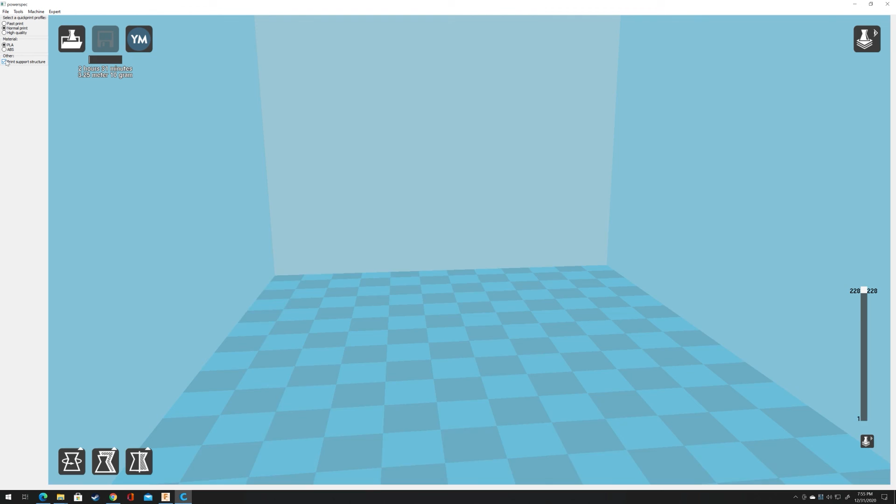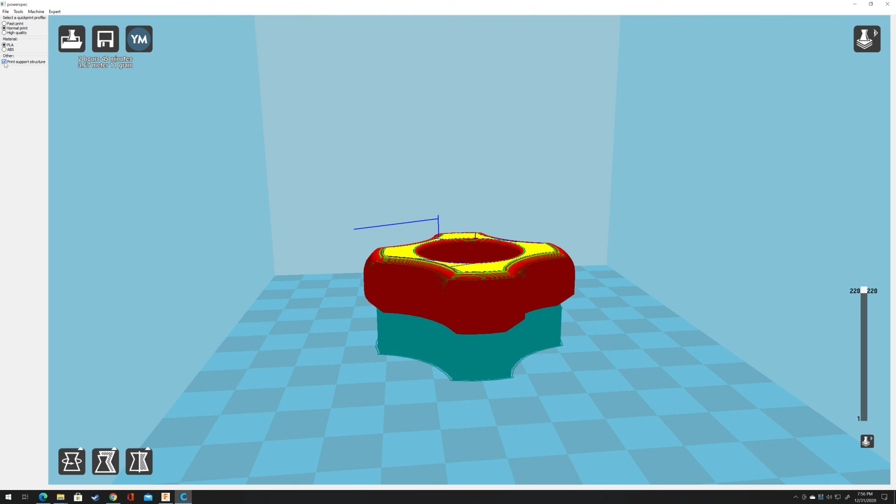But for me, I'm going to just cut the scaffolding out and just print it like this. In the end, it would be kind of nice because I can just literally grab the knob, and it will snap off the base of the printer.

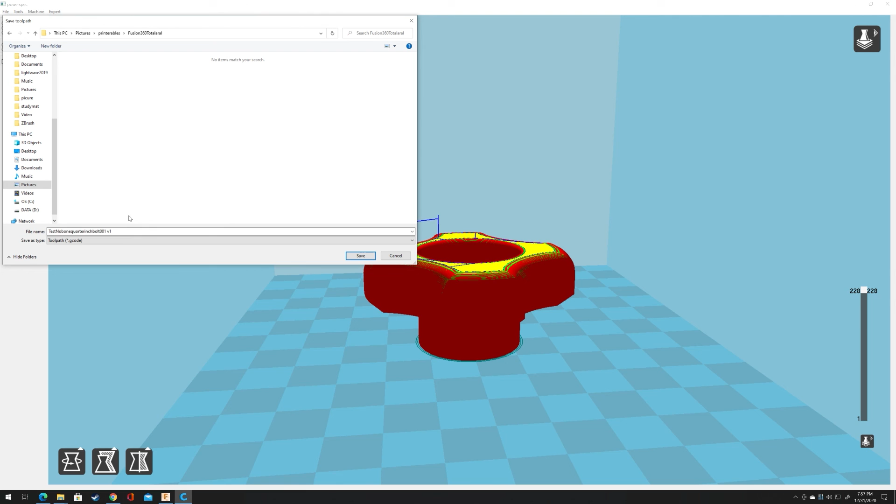So with that done, I can go over here to File and save it as G-code. I'm going to go over to the tutorial and save this accordingly. And now I've saved it in G-code. G-code is the CAD/CAM language which the printer understands, and it will go off and print this. That I will not show today. It'll be a subject probably for another video if you wish.

But that basically concludes my video presentation.